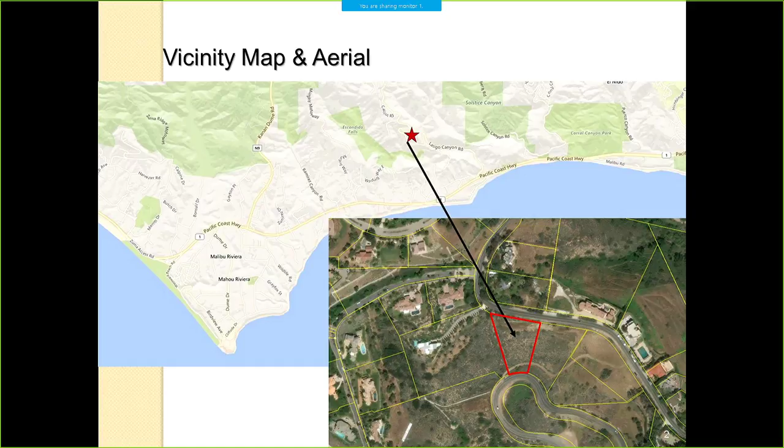Good evening, Chair Marks and members of the Planning Commission. The project site is located approximately 1 mile inland from the Pacific Ocean, in a canyon neighborhood in a windy section of Latigo Canyon Road. The neighborhood is developed with 1-, 2-, and 3-story single-family residences with accessory development, as seen in the aerial photo. The property is bordered to the north and west by single-family residences, and to the south and east by vacant parcels.

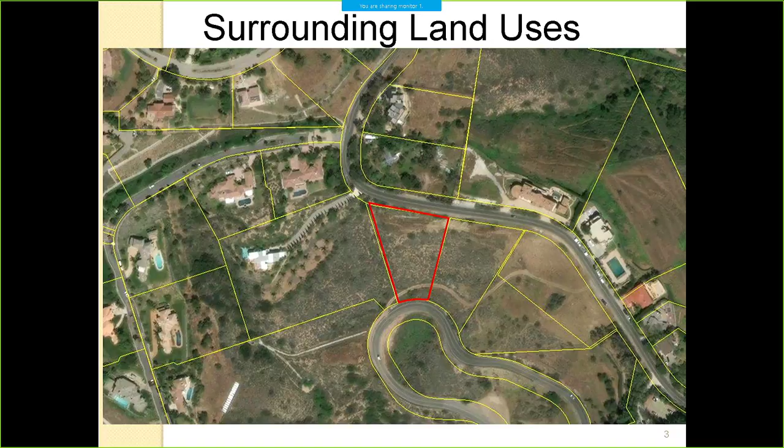The project site both fronts and backs into Latigo Canyon Road. The applicant is proposing construction of a two-story single-family residence on a vacant lot. The two-car garage has a car lift that lowers into the ground. A new wastewater treatment system and associated development is also proposed.

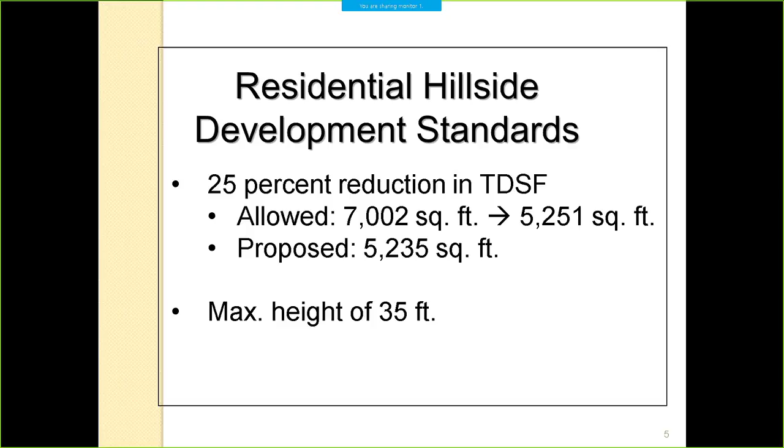The project meets the definition of hillside development and is subject to additional structure size and height standards. The maximum allowed total development square footage was reduced from 7,002 square feet to 5,251 square feet. The proposed square footage is 5,235. In addition, the maximum height of the project as a whole, from the lowest low point to the highest high point, is 35 feet. The project meets both of these standards.

The application includes a variance for development on steep slopes, a site plan review for a height up to 24 feet for a flat roof, and a minor modification to reduce the front yard setback by 50%. The reduction of the front yard allows the structure to be built on the flattest area of the lot, as shown in orange, which reduces grading and landform alteration. If 68% of the lot was not characterized by steep slopes, as shown in blue, neither the variance nor the minor modification would be necessary.

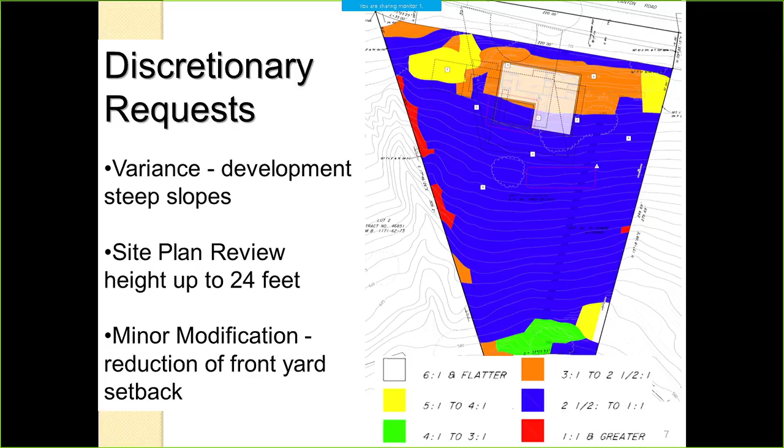The proposed residence is not likely to obstruct primary views of neighboring residences. We haven't received any calls regarding view blockage from neighbors, nor would the project have a visual impact from public scenic areas, including Latigo Canyon Road and Escondido Falls Trail, and would not adversely affect neighborhood character. The project is notched into the hillside and conforms to the natural topography, and the top of the highest point of the project, the railing on the roof deck, is below the finished grade of Latigo Canyon. So here's Latigo Canyon, and here's the top of the railing.

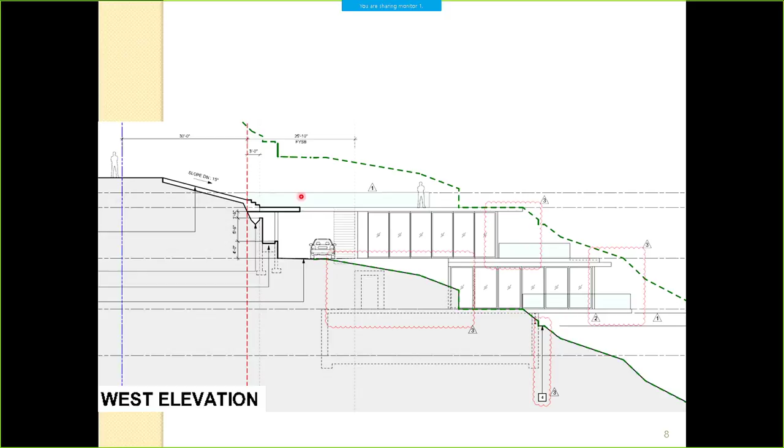Sorry, I'm having trouble with my mouse here.

Just going to skip that.

So the floor plan shows access from the car lift to the lower level of the residence. You can see the garage here with a corridor that provides access to the interior of the residence.

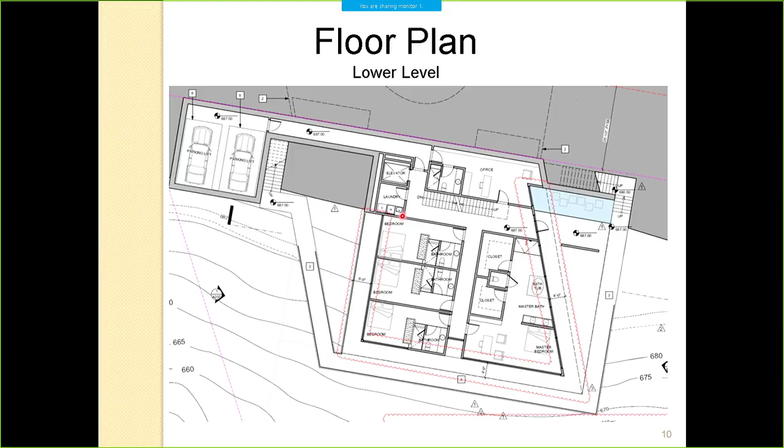A question regarding the unexcavated crawl space on the basement floor plan was raised this morning, and the applicant has agreed to revise the area to show a crawl space of less than 6 feet in height with a solid floor.

So when the applicant speaks, he'll be showing revised sections showing a 6-foot crawl space with a solid floor. The applicant also informed me today that a backup generator will be placed in the mechanical room in the basement, which is right here.

The generator is important because it'll provide power in the event that there's a power outage to operate the car lift.

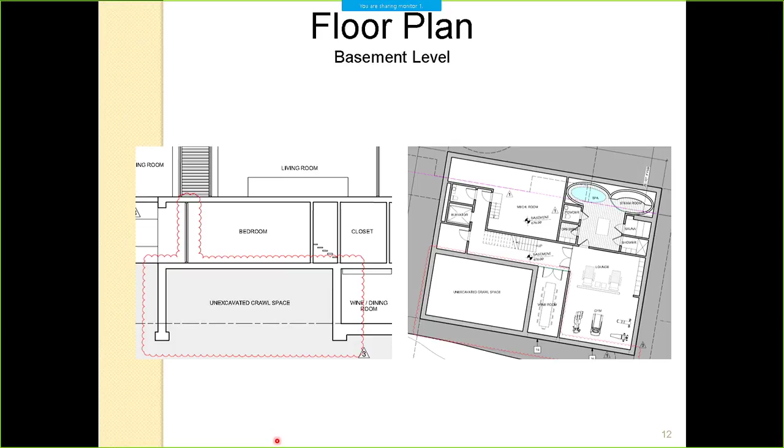The applicant did inform me today that they are amenable to a new condition of approval requiring removal or undergrounding of the power poles prior to framing, and will coordinate with Southern California Edison to ensure compliance with this condition.

The power poles and the lines are pretty close to the story poles if you visit the site. So just to help with potential safety and fire hazards and also view issues, the applicant will remove these poles.

I did receive one telephone call today from a neighbor regarding the power lines causing a fire hazard due to the close proximity to the proposed residence. I believe we had that issue resolved.

So with that, staff recommends adopting resolution number 1850 to approve CDP number 16006, along with discretionary requests inclusive of new recommended conditions of approval.

And those are to have the power lines removed or undergrounded prior to framing of the residence, requiring a backup generator in the mechanical room to be shown on the plans prior to planning approval, and to put in a solid floor in the crawl space to create a ceiling height not to exceed 6 feet. Those plans would be revised prior to planning approval as well.

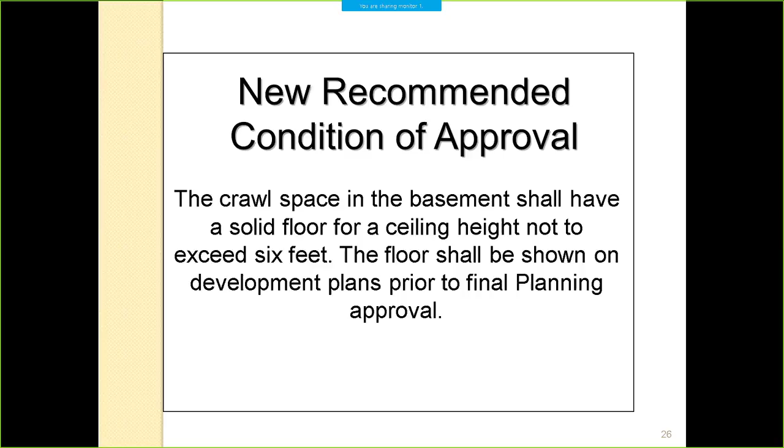I do have a video of the car lift if you wish to see that. It's about 38 seconds. Please do.

I don't think there's any sound, but you can see how it works here.

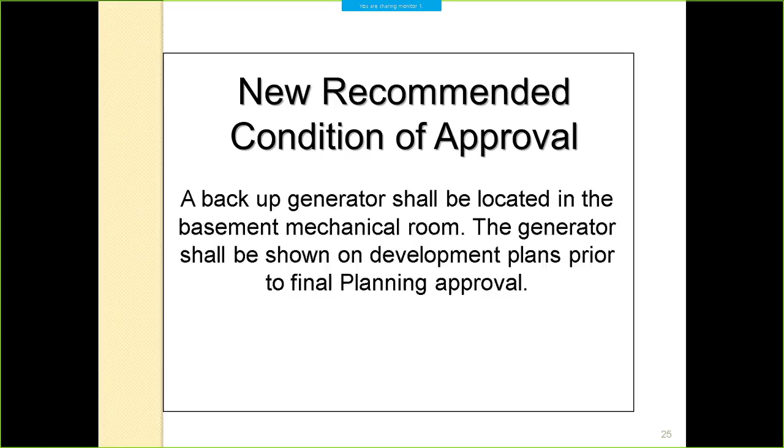I think it repeats, so I can pause it. That concludes my presentation, and I'm available to answer any questions.

Thank you. Thank you as well. Do we have any disclosures?

Yes, Commissioner Pearson and I visited the site this afternoon, noted some of the things that have now been addressed, the new conditions put in with the generator for the car lift and the telephone poles, and we met with the applicant and the architect and got a good look at the project.

Go ahead. I talked to Richard on Thursday about the unexcavated mechanical area. And the answer came tonight.

Commissioner Uri and I visited today and met with the applicant team right here. I'm going to go into a little more detail on it.

My first concern that was addressed is, what if the power goes out and you need to get in your car and leave in a hurry, and it's down in the lift crypt or whatever we call that. They said there was a plan for a backup generator so the lift could still operate, which led to my concern: if a fire comes down the hill in the middle of the night, how quick can you get out of there? I'll leave that for a question later, but how long it takes for the lift to operate, I think I got a pretty good idea there.

I don't know if you saw that, so is it that path only, or can you also drive in from that path? This is the only way to drive a vehicle into the site. There are steep slopes here. There is a roof deck here for fire department access, but the slope drops down from Latigo Canyon, so this is the only access.

Can I tag onto that? So if you're up on the road, can anyone just walk onto the roof? No, there'll be gates proposed. It's just hard to tell, it's a different, interesting design. During your presentation, you can dig into that further.

On the site visit, there's an existing grade that goes further down to Latigo, kind of loops around by another set of story poles posted there. So would there be no easement across that other property? That's the exclusive entrance for this one, as far as the plans go? Correct, there are no easements proposed as part of this project.

Okay, and then the other question - in the demonstration of the slide lifts, they had two positions, either underground or above ground, right? Theoretically, what if they just always park the cars with one sticking on the poles, 15 or 20 feet off the ground? Is there any requirement that they have to lower the car inside? Or they could have it inside the lift but still have the lift up, or a car on top of the lift with it all up. Is there any specificity on how that's managed, kind of tagging on with what Mikey said there too?

If they just left it in that position, looking at the property from the road could look kind of weird, like, hey, there's a flying car. So I don't know if there's any type of condition, or if maybe the team could speak to that. The other side is in the video they showed entrance and exits only happening from ground level. For the design of the house, it looks like they exit the car from underground, go through the basement, et cetera. So stating the obvious there, but maybe just a little more discussion on the mechanics of this, if you could entertain that. That's all I had.

Do I have a clicker? Okay, so this slide quickly shows the form and the mass of the previous design. As you can see, it's about 4 feet above the street level at the highest point, and overall height of the building of over 40 feet from the bottom to the top, looking at it from the other side.

Our design was very careful in preserving the views, especially with the hillside issues that came up because of the street being a view corridor. So actually it was something that was really built into the new codes that was written, that it really caused the design to be articulated and formed in a way that allowed for the views from the street.

So I think that really was an outcome of the new codes that were written, and also really like the idea of the architecture to really kind of blend into the landscape and really step down the hill. So we were very cognizant of that design, and the outcome was really to create a design that the highest point, even if you include the railings, which is glass and permeable and see-through, is level with the street, and really the mass is 4 feet below the street at the lowest level, and even 10 feet below at the highest level. That was really, really important for us to try to achieve.

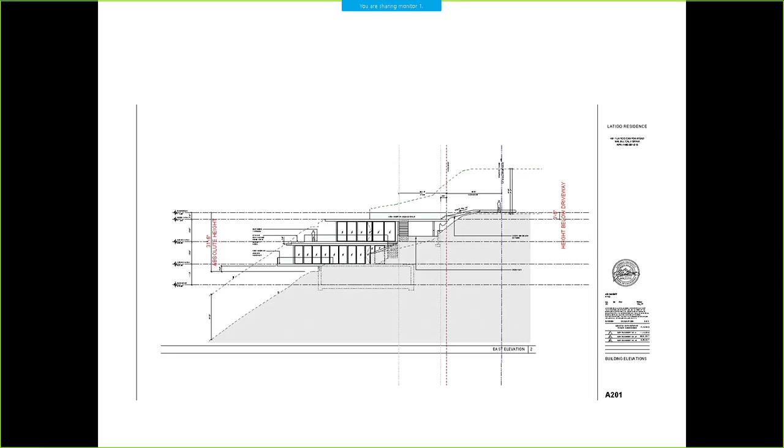So the question that was raised today, when Lily reached out to me, was the area we called unexcavated basement. When you look at the original plan we handed out as part of the application, it didn't clarify well what we were intending for that space. So two questions arose: why was the wall around the perimeter, and dirt filled in the middle? Why was the wall out there?

Well, the wall is a structural wall, which may or may not need to be a wall. We know that the previous design had like 25 to 30 feet deep caissons to support it, so we know this house will probably require as much as that. The perimeter was really meant to be the area in which the caissons would be placed, and those caissons may have a grade beam on top of them. Well, I don't know yet because we haven't gotten that far in the structural.

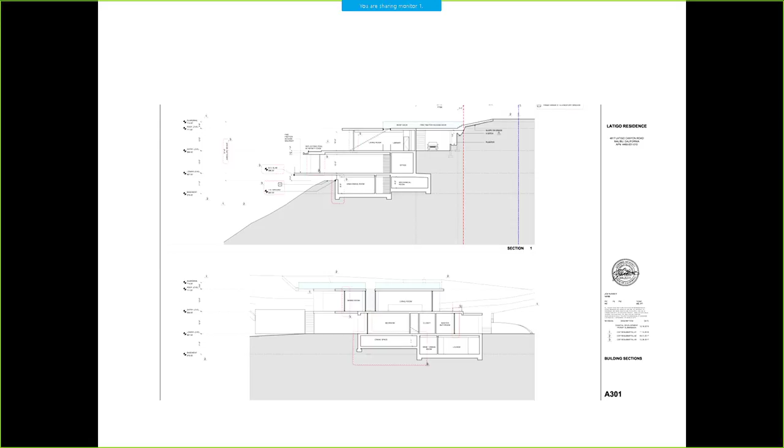We actually haven't even started the structural. But having done some of these kinds of houses, I know we're going to have the caissons supported by a grade beam. So we could not have the wall, but it would be replaced by a series of caissons up until you have the surface of the crawl space. The crawl space was meant to allow for an easy way to run HVAC ducting and plumbing. There's a series of bedrooms above that space, so we wanted to run the plumbing, electricity, and HVAC in that space. I think if we were to make it a 6-foot space, that would be really great.

But I think the options would be something to consider because it's still early in the process. It's slab-on-grade, so there's no crawl space as option 1, or it's a typical 18-inch crawl space with a slab where we could just run the ducting and the plumbing, etc. Or we drop it to the allowable 6 feet to create a space that could be used maybe for more mechanical or storage. So those are the options. What I drew was actually the biggest space, but we are still discussing that as I'm up here speaking. So those are the options.

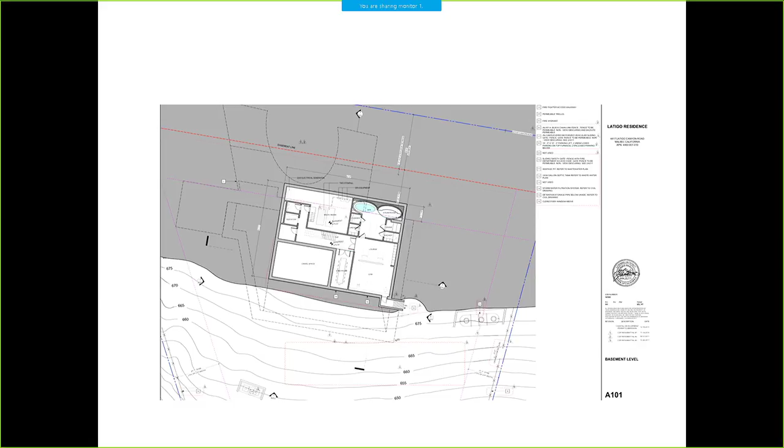And finally—oops, wrong way—the question of emergency energy, electricity, is something the client was considering from the beginning because of recent blackouts and things. The ability to operate the lift was critically important, even in a blackout. So we had thought of placing an emergency diesel generator in the mechanical room. In the handout I gave you, which is not on the original plan, there's a location where we would propose to put a generator in that room, along with the other mechanical equipment.

And the final question, the potential egress that Mr. Pearson addressed a while ago, is should we have a way out of that room? What we propose in this drawing is just a little corner of a way to open a door into a sunken light well, and from the light well you would have access out of that space. That would certainly be one option to provide an egress way in case of some sort of emergency, as Mr. Pearson indicated—a fire in the kitchen where the stair was not accessible.

I did speak with a building and safety person here at Malibu, City of Malibu, and there are right now, in your other drawings, a series of clerestory windows that stretch across the gym and into the wine room.

As I think most of us would be able to, in an emergency situation, operate those tall windows and crawl out, or we could provide a ladder or something that could be used to get out. But I guess an elderly woman or a man with limited physical faculties might have a difficult time getting out. That's a question raised by Mr. Pearson, which I didn't really think about. But in discussing this with the building and safety person, he said it's kind of a conflict.

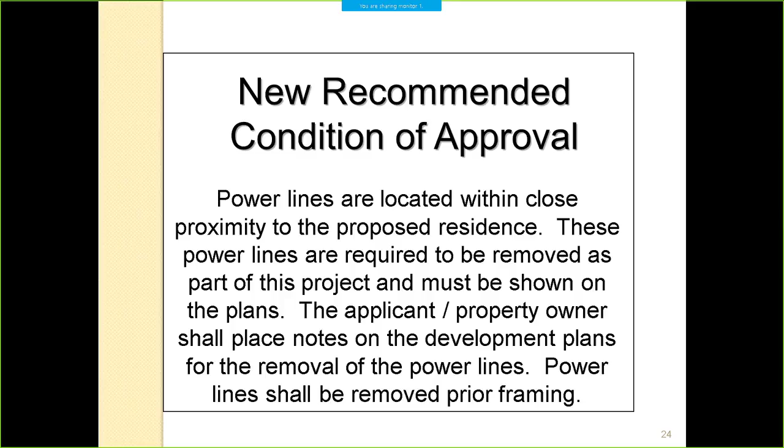If the applicant is, that's what I think's missing. I agree with Mr. Payne. Safety is number one, and if you got to go overboard for safety, I think it's worth doing. So I'm inclined to go with Commissioner Pearson, that says you've got underground, and that's got to be done prior to any kind of construction taking place.

Okay, prior to which point? Prior to grading? Prior to anything. You don't want to touch those poles. And the poles are right on the pad, 6 inches from where the... How about prior to issuance of grading permits? Would that be? As long as that says nobody can do anything until that stuff's underground, that's fine with me.

The first step on the site would be to grade and install the foundations. So if we did it before the grading permit was issued, we could make it a condition. Work for you, John? Jamie, what do you think?

Hello, my name is Jamie Harnish, I represent the applicant. The only thing I'd like to say is, yes, the applicant certainly wants to go underground with those poles and utility lines if it's within their property with a new easement. It's up to Edison whether they want to continue to cut through our property and create a new easement, which we would be agreeable to. But if Edison decides to go to their original easement, we have no control over that. The only thing we have control over is arguing with Edison to remove the poles and lines from our property where they don't have an easement, and yes, we're willing to give them an easement to go underground.

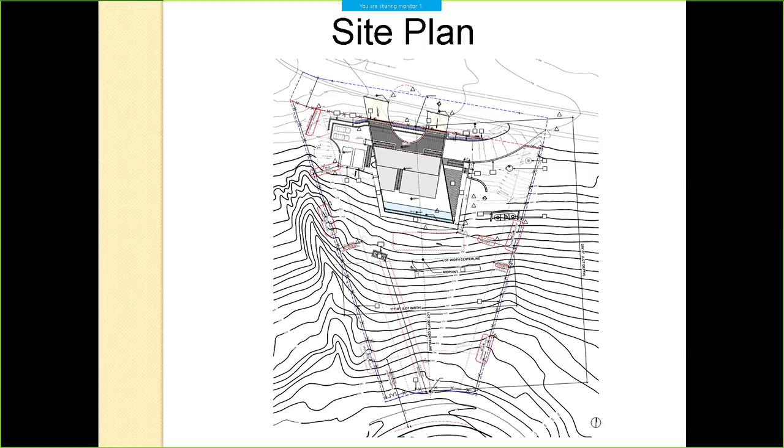Excuse me, could you please go to the microphone so we can get it on the record? Thank you. To repeat myself, the power pole is one here, and the one that's on the side is like right around here. And then the other one, there might be another, I think the other one is way down at the street over here. So it goes to here and to here. This corner is where it gets pretty close, like 4 or 5 feet from the property. And to be honest with you, I don't know where the other easement is, except that I know that it's over here somewhere.

Our civil engineer Gareth Kreitz told me that the power pole goes through our site, but there's another easement on this side of the property.

I have not talked to him more specifically about where that easement is. But based on your comments, you're willing to give an easement there if it works? Yes, I think for that everyone—if it's undergrounded. I think the owners were not aware of another easement there, and I think they were willing to underground it through their site to make that eyesore disappear.

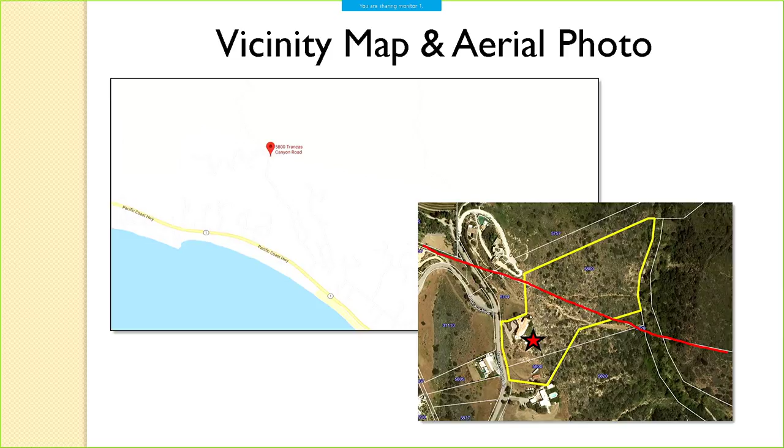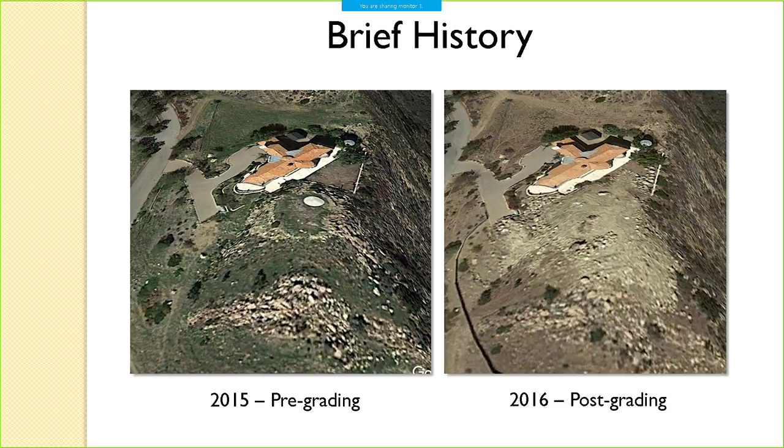In May of 2016, Planning Department and Code Enforcement staff received a complaint regarding grading without the benefit of permit. A site visit was performed and code violation number 17002 was opened on the subject property. The Google Earth images on this slide show the pre and post grading, and although I don't have a photograph of the site condition prior to the grading, you can see the disturbed area. The next slide shows photographs taken in May 2016 after receiving the complaint.

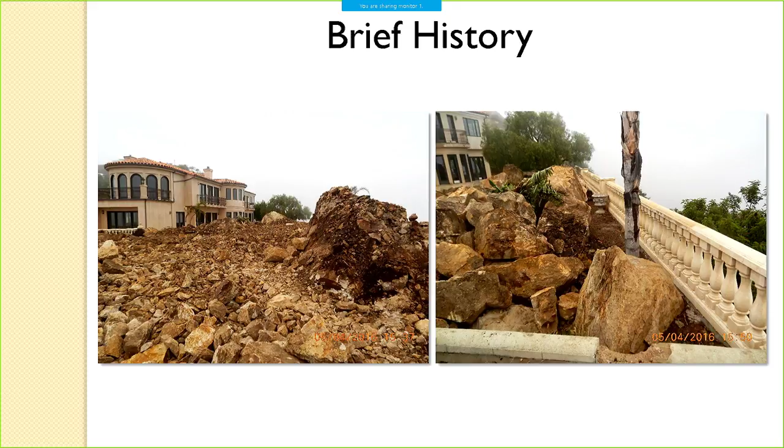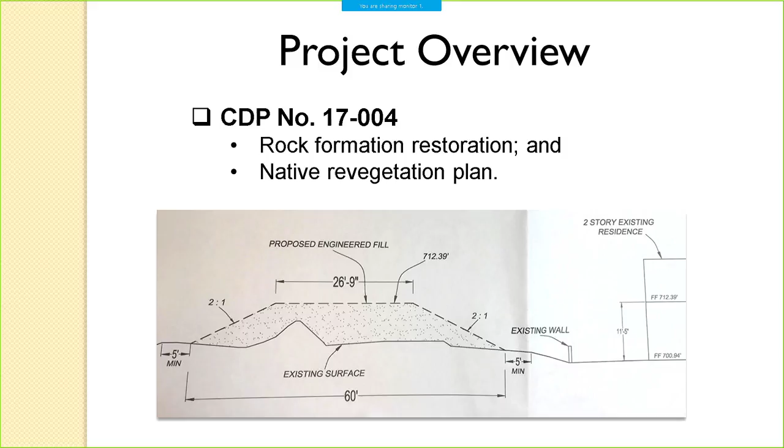The project before you tonight consists of the rock formation restoration, measuring approximately 60 feet wide at the base, 27 feet wide at the top, and 12 feet high, along with a native revegetation planting plan for erosion control. The reconstruction will use a mixture of crushed rock from the site, fill, and concrete. The applicant is prepared to answer questions specific to the reconstruction technique following the staff's presentation.

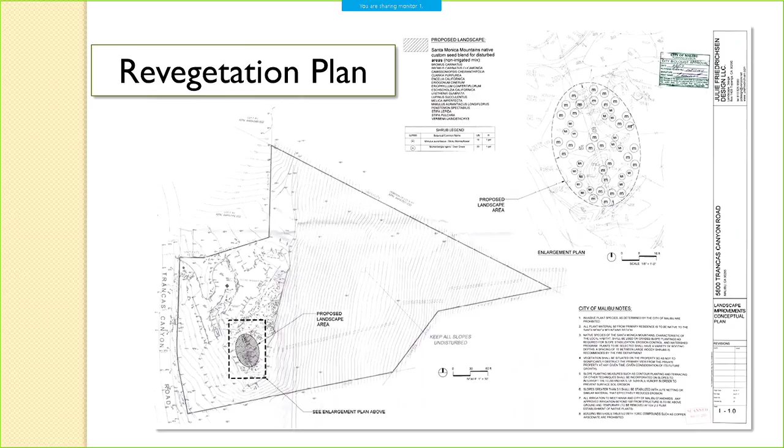Staff has received limited correspondence since the notice of application was posted on the property in November 2017, limited to questions regarding the scope of the project. In summary, staff recommends that the Planning Commission adopt Resolution 1847, approving the project as conditioned. This concludes my presentation. The applicant and staff are available for questions.

Thank you very much. Do we have any disclosures? I did a drive-by. Anything else? Commissioner Uhring and I attempted to go there, but it was Friday during the tragic accident, so we did not make it. I live nearby, but not within 500 feet. I bike ride by that thing, and it's the steepest bike ride you've ever done up that hill, so I know the property very well, and I did not see any of that removal of rocks going on, and I do ride up there pretty often. I didn't notice it. I have no disclosures.

I did have a quick question. Do we have any speaker slips on this item? I don't have any up here yet.

Okay, so let's see. Any questions of staff then?

Jessica, somewhere in the staff report it talks about the grading rules of the LIP. I went back and read those, and my conclusion was if they came in to try and get a permit to do that grading, it would never happen. Is that fair? We can't say definitively, but yes, the intention of the grading ordinance is to minimize landform alteration.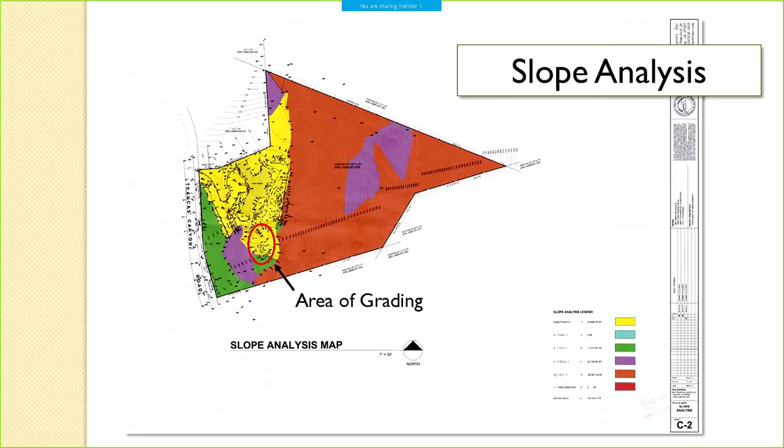I guess just to clarify, if that peak had still been there when the survey was done, would we see some red or purple, or would it have all been yellow? Does that make sense? I believe you would see some, yeah. It's difficult to tell now after the fact what the color would have been, but yes, it would have been a steeper slope. Okay, thank you.

Then after that, what do we got? So it's just a public hearing, but we don't have an applicant. Opening the public hearing. Anyone want to speak on this? We'll take that as a no. Closed. So, discussion. Anything? Make a motion to pass the staff's recommendation.

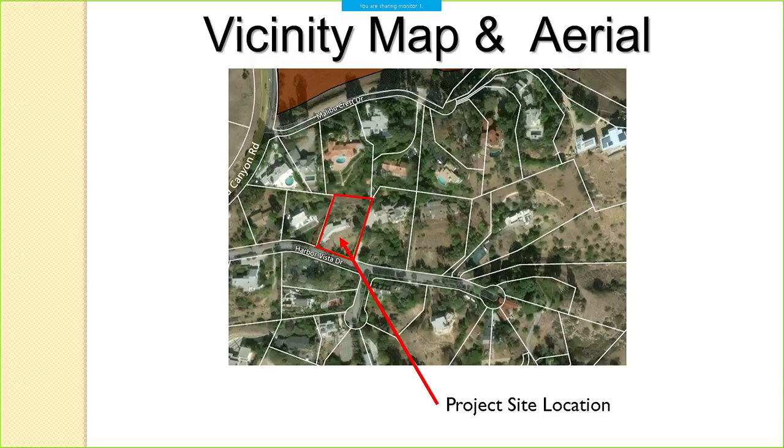The project proposes a total of 85 square feet to be added to the existing home. The majority of that is going to be a covered entry that actually is open to light and air on the sides, but because it extends greater than 6 feet from the residence, it's part of the total development square footage. There will also be an addition to the home.

On the rear of the property, it's enclosing an area that essentially already has 3 walls. There is an unpermitted addition to the home that's going to be removed. We couldn't find any building permits for it, and the applicant proposed the demolition of it.

About 13.5 linear feet of exterior walls are going to be altered by this project. Some hardscaping that's there is going to be removed, and it will be replaced with permeable pavers. A new wastewater treatment system is part of the project installation as well as landscaping. The pool is going to be replaced in the same location, so we don't have a change there footprint-wise.

However, there is a wall behind the home. It's currently, I realize the staff report wasn't too clear on this, but that wall is approximately 4 or 5 feet tall, and it's not adequate enough to protect the slope that's behind this home.

The engineers looked at that, and a variance was required to allow for a single retaining wall that at its highest point is going to be about 14 feet 8 inches tall. That's only approximately 20 to 22 linear feet of the total size of this.

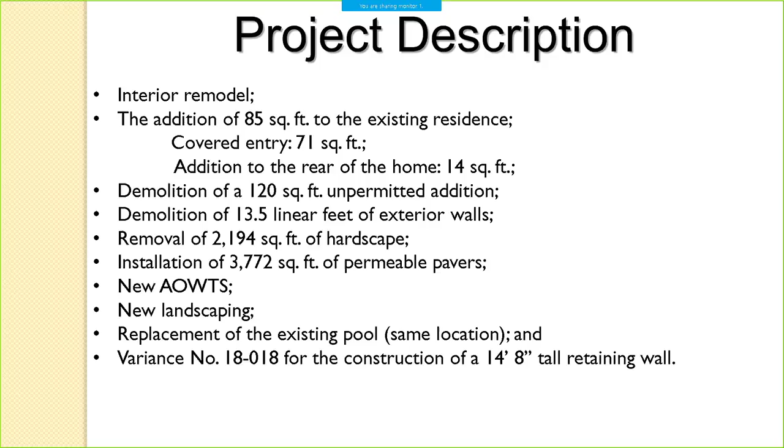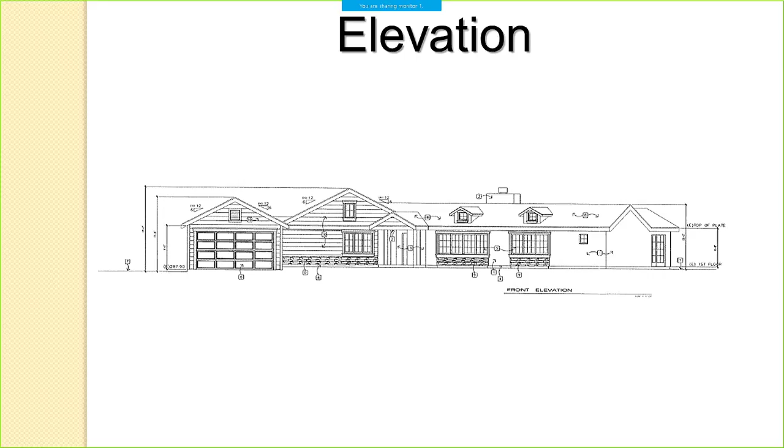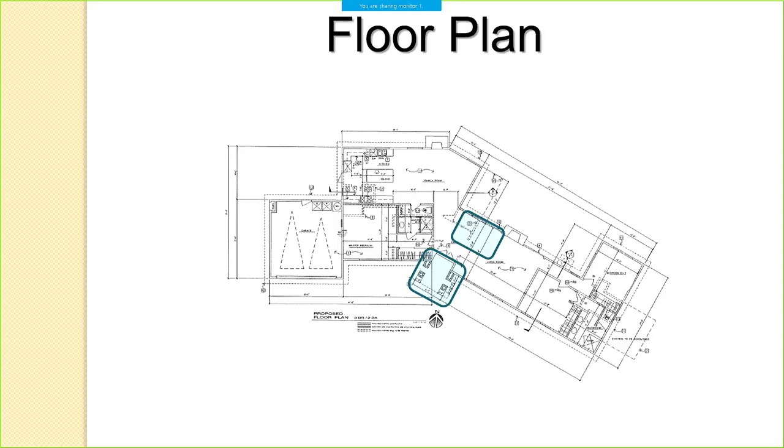Looking to the right of the screen, you see a dashed box. That's the unpermitted addition, approximately 120 square feet, that's going to be removed.

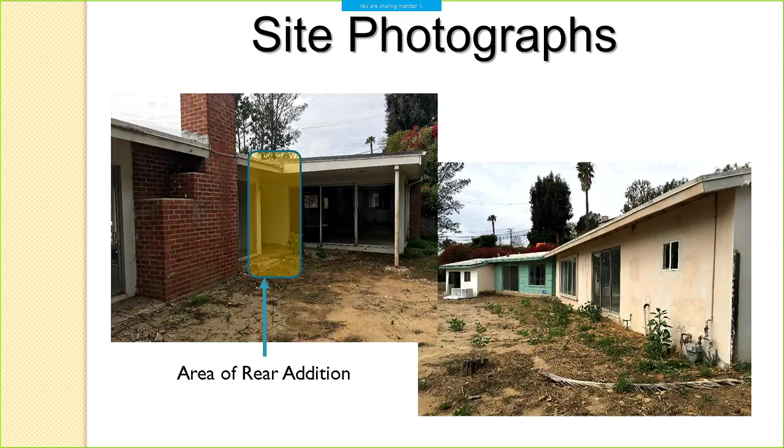In yellow here, you see the area that's going to be enclosed. You can see how they're going to essentially fill it in and capture that space. There'll be some interior changes too. The lower photograph is a photograph of the front of the home.

Staff recommends the adoption of Resolution 18-52 for the approval of the project. Staff added a condition that was included in your supplemental report, and the purpose of that condition is to address a neighbor's concern.

Harbor Vista, as you know, is a very narrow street. When they were doing construction on this home, the demolition work, the neighbors reported that some of the construction traffic was using their driveway to make U-turns. So a condition's been placed on the project.

The goal of that condition is that they're going to either use their on-street parking directly in front of this home, or keep the vehicles on site. The purpose of this construction management plan is to prevent any impacts on the neighborhood, as well as cause any delays along that road.

So staff recommends approval of the resolution, and the applicant is aware of that added condition that was in your supplemental, and the applicant has agreed to it.

Thank you. So to clarify, the staff's recommendation is for the resolution, it does not need to have it added to it. It's the supplemental resolution, correct? Yes, that is correct.

If you could step back to the microphone so we can hear you. You probably know where it is, but it's right here. It looked like they had some kind of excavation equipment that banged into the wall. It's an existing wall, probably maybe 4 or 5 feet tall, and on top of that we have bougainvillea in our fence line. So I just wanted to clarify how that would be handled.

I will, okay, yeah, that's fine, excellent. I just want to make sure. Anything else, sir? No, okay. If you could, the slip is there with a pen, just fill that out, and then if you'd like to rebut that.

Show again which wall you're talking about, if I could use this. Let's have Terry point it out to confirm. Okay, so our fence line's right here. This here is along our property line. Your property begins up here, is that correct? Over across the street. This is the road, right here. Right up here, right, correct.

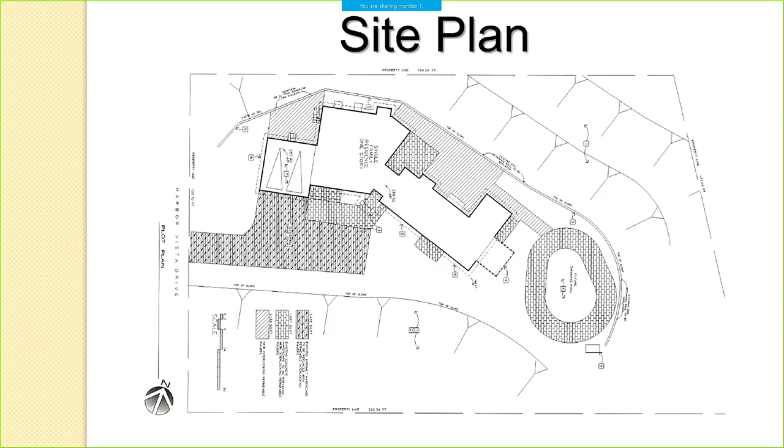Yes, the wall you're referring to is what we are proposing to replace. That's part of the wall, about 5, 4 to 5 feet here. There was another structure here that has since been taken down, but that is addressed in this. So the other question would be, we have our fence line right there, and our fence has bougainvillea growing over it. So what happens to my fence and my bougainvillea?

We will essentially, here we go, the fence is in good shape at this point, I realize, I think. It's brand new. Well, it's not brand new, but it's fairly new and in good shape. We don't really plan to do any repair work. We are doing landscaping throughout, up to the property line. And this wall will certainly be replaced, even better than the one that was there before. Well that's fine, but how will that impact my fence? It should not impact your fence. If anything, it'll stabilize it and keep it from shifting or falling over. Fine, okay, well that answers my question.

Good, thank you. Okay, that's what public comment's for. Thank you, thanks for working together on that. Did we have any other comments, or do you have anything else you'd like to rebut or address? No, not at this time.

There is one item I was informed just very recently, since the report, even the addendum came out, that the owners, Hesby Ohio LLC, has been changed to Harbor Vista LLC, with the same entities, the same corporate officers, all of that. I don't know, we have to address that in some fashion, obviously. Is it the same entity, just a name change? Yes, it's not a new entity. No.

Then you would just need the documentation showing the change of name. Is the ownership retained by the same party? Yes. Okay, it just needs to be the property owner. If they're changing the name on the deed, then we would need the documentation for that. Yes, we can provide that, certainly.